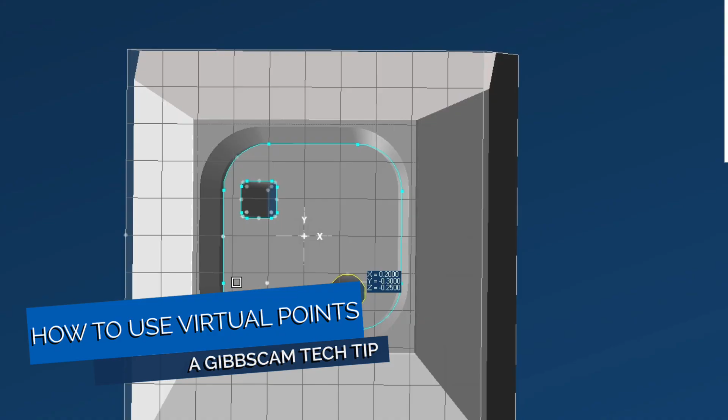In this video, I will be going over virtual points and how we can utilize them to make our workflow smoother. Virtual points allow us to avoid extra steps that were needed in the past to grab precise feature locations. Eliminating the need to generate unnecessary geometry is helpful because it of course saves time and effort. And with that, let's jump in.

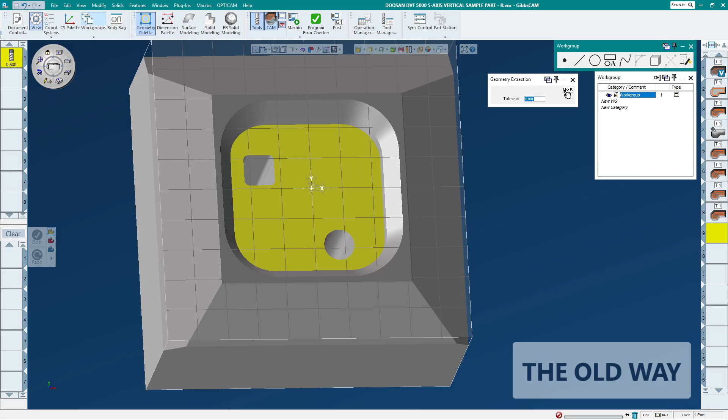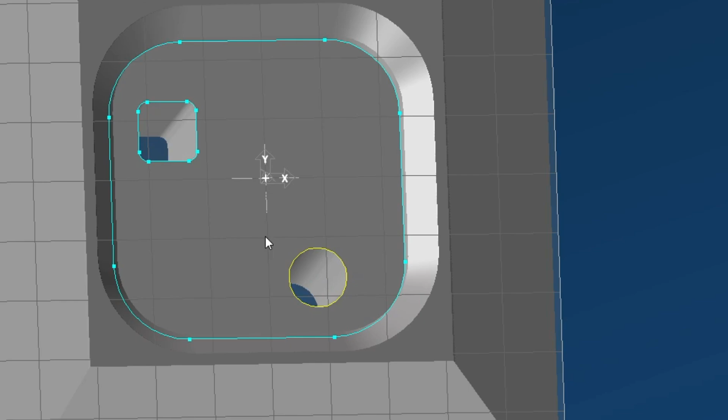Now in the past, if I wanted to find the center point of this hole, I would extract the geometry and then utilize the geometry palette to place a center point in the middle of this circle. Now with that point available, I could then go up to the dimension palette and choose to measure the feature location. But maybe I don't want to leave this point here. And when I go to delete it, the dimension goes with it.

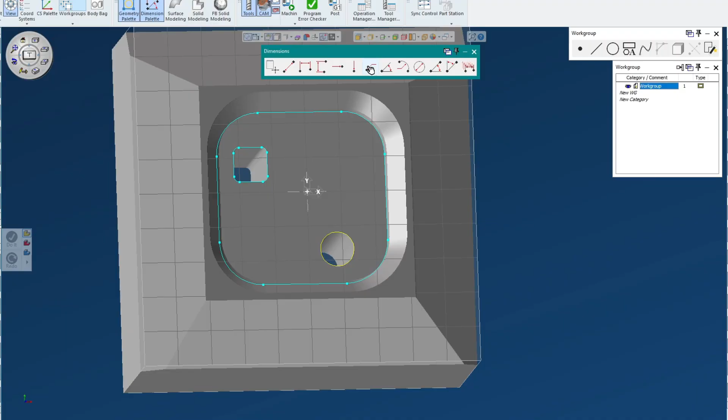But with the addition of virtual points, all of those extra steps are eliminated, and we can leave dimensions in place without leaving excess geometry. When I go up to the View drop-down menu and down closer to the bottom to look for virtual points, I'll turn those on, and you can see with the dimension palette open and any one of these tools selected, as I hover over these pieces of geometry, the virtual points appear.

That's what these little gray points are that just kind of appear and disappear based off of how close your cursor is to them. And you can see I can grab that center point and get the same dimension, but of course, no excess geometry and the dimension stays in place. But we get more options as well without having to manipulate that point.

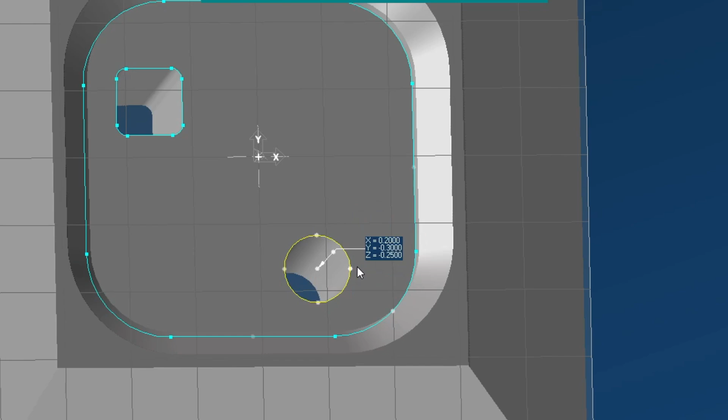We get the center point of this circle. We also get 4 quadrant locations on this circle. If we look at the square cutout, we get corner radii center lines, corner radii center points. We even get center lines on the flats. The stock cube also has virtual points that appear with it as well.

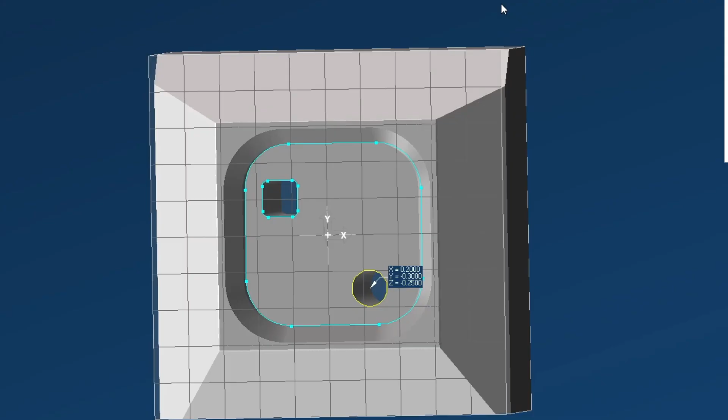Now there are many options for measuring, but that's not all that they're good for. If you're familiar with utilizing the Alt key and clicking on a feature to grab values for any of the tools under Modify or even process parameters such as depth values, you can see that when I hold down my Alt key, these virtual points once again appear.

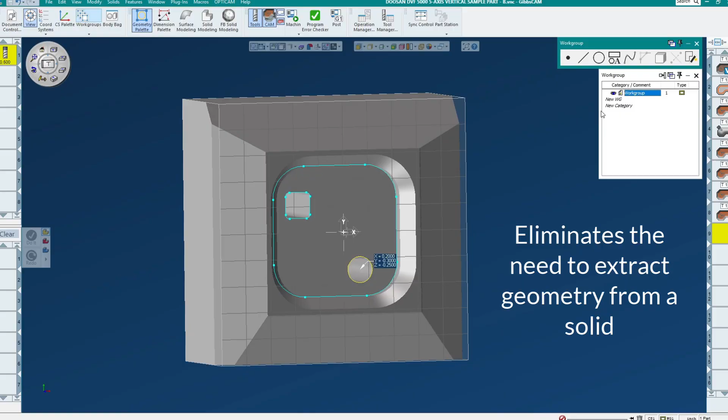And furthermore, virtual points really eliminate the need to extract geometry from a solid model in the first place. If I go to a new workgroup where we've got no geometry here, you can see I'll hold down my Alt key and nothing appears except for the stock cube coordinates.

But as soon as I go up to the transparent toolbar and turn on edge selection, once I come back here and hold down the Alt key and hover over the edges, those virtual points all appear. Again, eliminating the need for any geometry extraction in the first place.

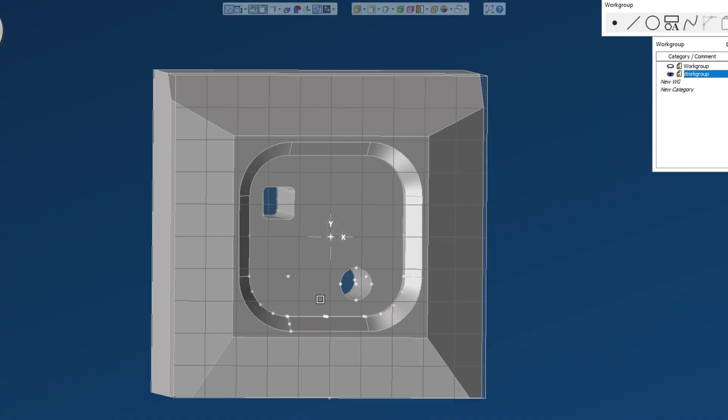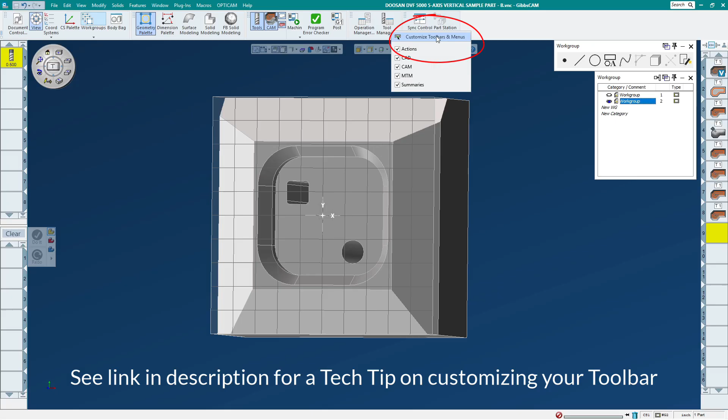Now, as you saw me do earlier, it's very easy to turn these on and off. We just go to the View menu and click the virtual points option, and now holding down the Alt key, we get no virtual points. And also keep in mind, you can add virtual points up here to your toolbar by choosing Customize Toolbars and Menus, just making that tool a little easier to access.

Utilizing virtual points can help you out by making programming just a little bit easier. Saving time and effort is always a great benefit, and these virtual points do just that. Also, having the control to turn them on or off whenever you please is a plus.